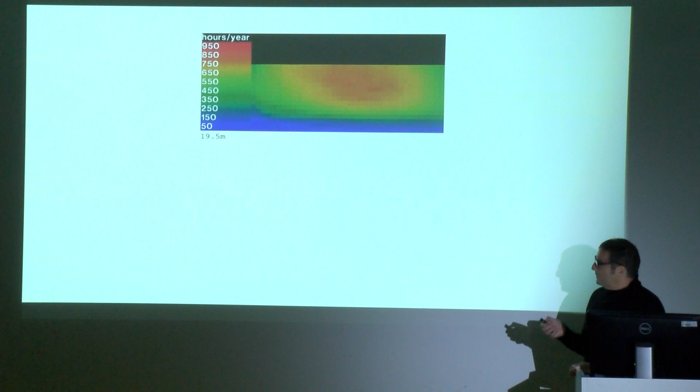So starting with sunlight, these were the kind of first tests we did in radiance at the ground plane, and this is a kind of typical annual year's map of sun hours, which tells you some things. It tells you this isn't very sunny and this is starting to get sunny. It starts to give you a bit of shape about the space.

So you start breaking the information down to the different seasons, but even that doesn't really help determine what you could do with it. So we started breaking it down even more, and we created 6,000 equally spaced isospatial points in space, and each one of those was analyzed and had a set of criteria attached to them.

We could then search through those criteria, different criteria we would set, and understand differences. So this is different times a year and different heights in the site. And what we were looking for was kind of volumes of space that had a certain criteria. So if you think of a garden in this country, you want a sunny space all year round if you can. If you think of a study, you might want something a bit more calm. If you think of the kitchen, you might want it very full of light in the morning, and a living room, maybe it's evening. So the kind of criteria you're setting start to determine what you're searching for.

So simple things we start to look at. This is the most sun hours - all year most sun hours. And this is the lowest sun hours.

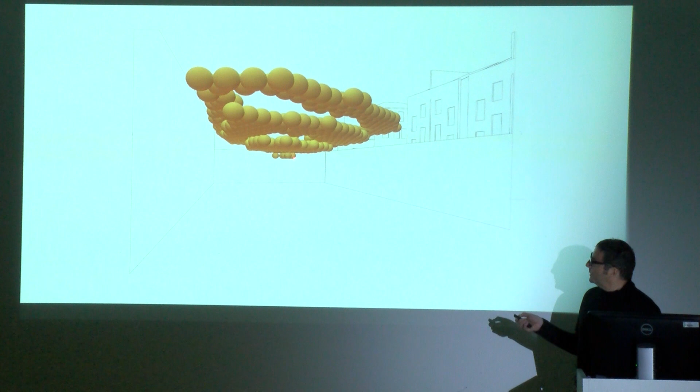So this one ended up becoming where we put the main garden, up in the air, kind of 5 meters up in the air, 2/3 of it towards the end of the site. We put all the bedrooms downstairs because the client decided they were happy with that, being dark.

And then this was a kind of critical one where we found where is there sunlight all year round, which sounds like a kind of obvious question, but what it means is in winter there's sun here. If you remember those maps I showed, there was no sun here, no sun here, but actually there is a little bit of sun up here in winter, and also in summer and autumn and so on.

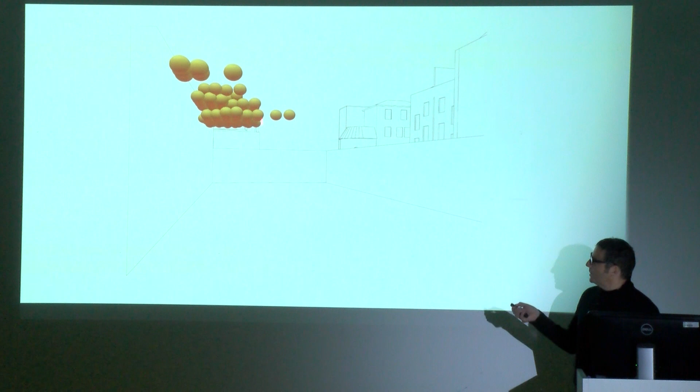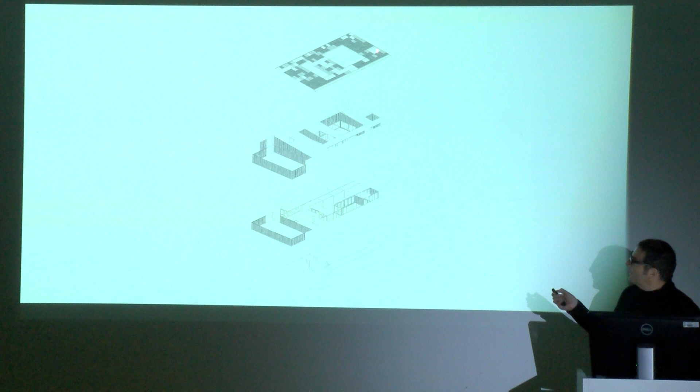So that led to a kind of organization where bedrooms are downstairs around 4 courtyards, and the living spaces are all above in double height spaces, and this very large glass roof that's also highly controlling of the light entering through it.

So you can see here this glass roof, and there's 1, 2, 3, 4 courtyards. It went up to the highest point it could, which is 10 meters up along the north wall, and sloped down to about 8 meters here.

And the kind of organization of the house is visible when you look at the elevation, in that the living spaces are double height above and the bedrooms are all below.

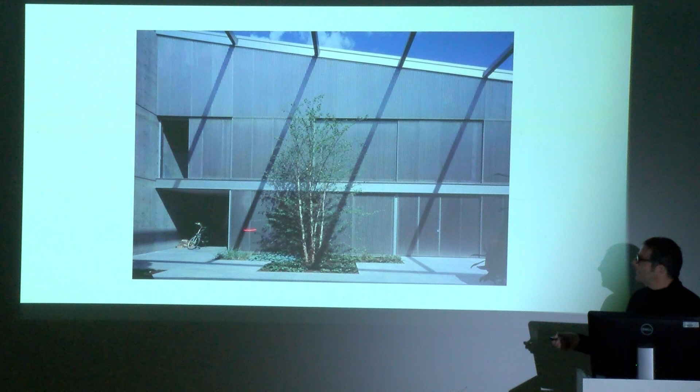And this is where I was showing you that cloud of all year round sun. So what we wanted to do is ensure that if there was sun, we got sun into the house. So if you imagine that gets sun on a winter's day, but everywhere else doesn't on the lower levels. But this gives you the sense that you're connected to the environment and connected to when that actual moment happens.

The house is all built from concrete, which kind of tempered the light, but also helps temper the environment and keep it cool in the summer, so it's all naturally ventilated.

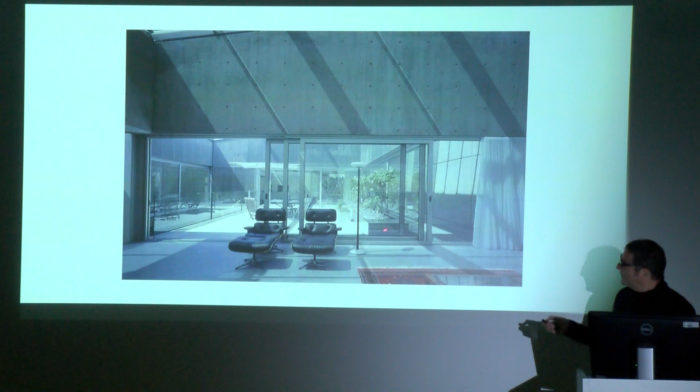And these are the double height living and dining spaces. And looking into the main courtyard that I showed you also where that cloud was, so we're a story up off the ground looking into that main courtyard space in the double-height living room.

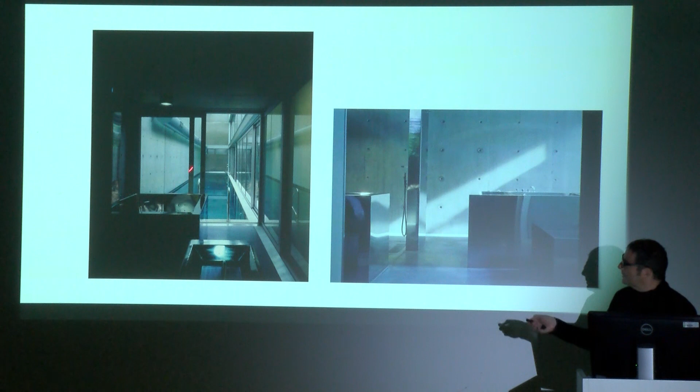And then you go down a level and the atmosphere changes quite significantly. This is the bathroom looking into the main swimming pool. So there's the backland site of the house in the end, hidden away so nobody knows it's there apart from these immediate neighbors. So it's very, very private, but it kind of creates its own environment.

This is a short film that we've been making, and really what we're exploring is the different atmospheres that exist in the house. This is shot in the winter, I think it was around November.

The facade kind of opens and closes. It's very inward-looking, creates its own world. But there are all these sequences of spaces you go through.

So he's now in the master bathroom we were just looking at, which is kind of dark and has a different feeling. Then upstairs you really sense the changes in environment as the sun moves around the site and the weather changes.

There's an awful lot of control of light within the house, so the glass roof has 3 different kinds of frit patterns and different densities, and there are blinds that retract and opening windows that let the air in and light in.

And the rooms were designed for the light to track around, you could see it there, but not where you're actually sitting. So it's very much controlling activities in each room, including how the roof worked.

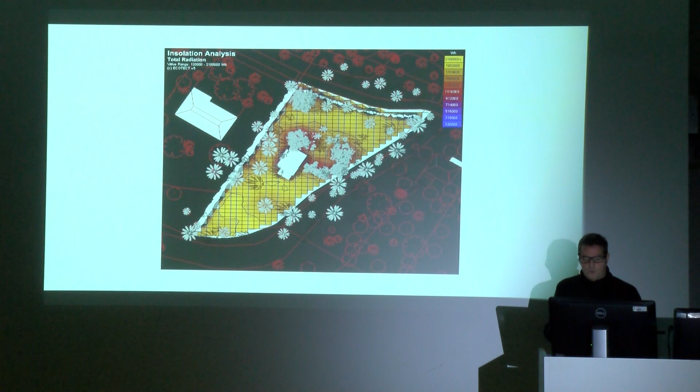So just looking at the sun position on the site, what we were hoping is that the canopy of the trees would provide sufficient shade. We wouldn't have to worry too much, but through this kind of analysis, we realized that wasn't quite the case.

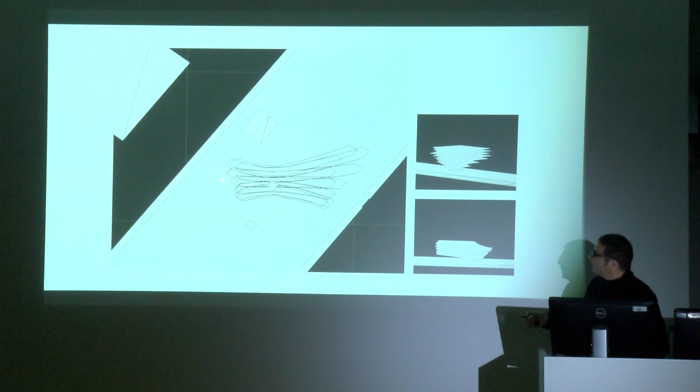So we wanted to find a site where, within the site, there would already be a good starting position by being protected from the trees, but maybe would need more work to do with it. So we started looking at self-shading structures. This is actually using Ecotect a long time ago, where we wanted to shade that 1 square meter all year round and just understand how big the scale of shading structures was to make that possible.

This is a similar exercise with a different plan. You can just see that the edge of the shadow just skirts that plan, and that's the form that's generated.

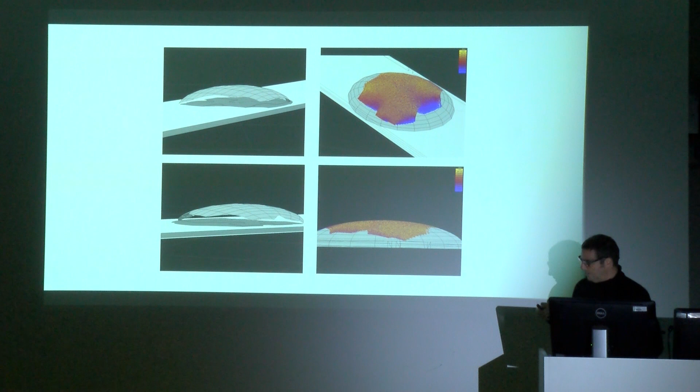And one part of the brief was that we weren't allowed to cut down any trees. So we had to find a space for that to fit, but also work environmentally.

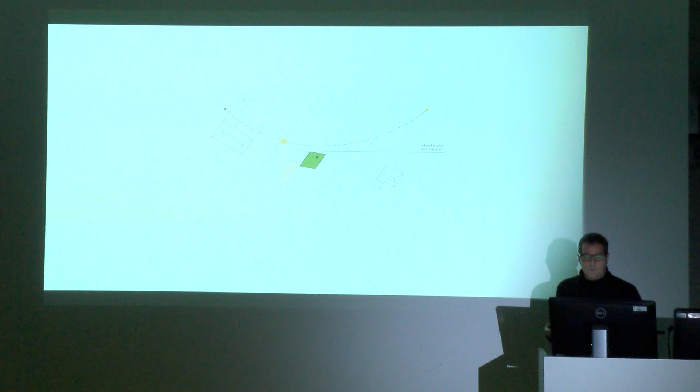So the form we generated eventually was actually this self-shading form that was completely open to the sea here and completely open to the jungle there. Solid on either side because that tracked the sun path. But also it was kind of interesting how it also solved other problems for us in that we got privacy from neighbours here and privacy from neighbours here and a kind of view towards the entrance from the street where you came into the house.

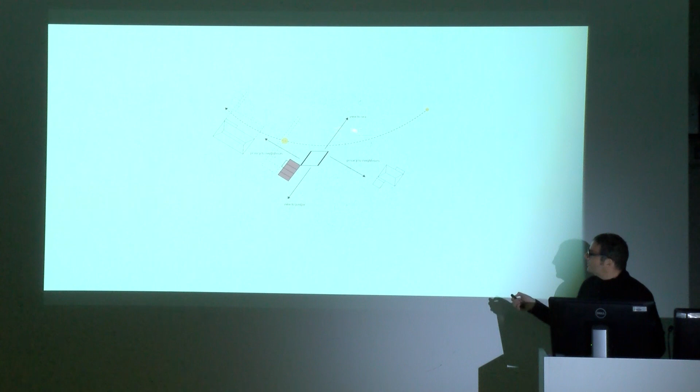So the house is lifted up off the ground to promote the breezes. The two buildings are separated quite a distance to allow the wind shadow to come over the front building into the back building. You get the views by being lifted up to the sea, into the jungle, and then cross ventilation through the building. So we had big glazed screens that open.

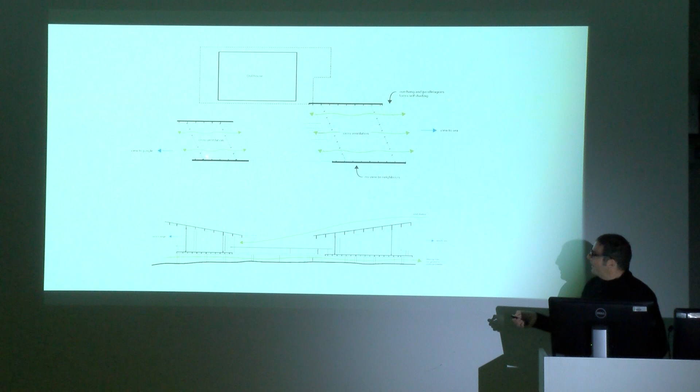And this overhanging parallelogram that we developed, it was all made from local timbers. So this is a very heavy timber used for foundations called kacha, so heavy it doesn't float, and that was used for foundations. Then laurel was used for the superstructure, which we needed in 10-meter lengths, which we found impossible to find in lumber yards.

At the same time, it was quite a complex form, although there's a kind of simplicity to it. Drawings were something we found very hard to communicate with the local builders. So we ended up producing models, literally saying, this is what I want you to build here, but a lot bigger. It was quite an interesting moment because when that model appeared, after having looked at drawings for a few months, they suddenly relaxed and were able to understand what they had to make.

So we built that model, and then we built bigger scale models of every single junction. As you start to look through these, there are some quite complex junctions generated from that simple form. But the fact that each one existed and was coded in such a way that they could easily understand where it was in the building really made a big difference.

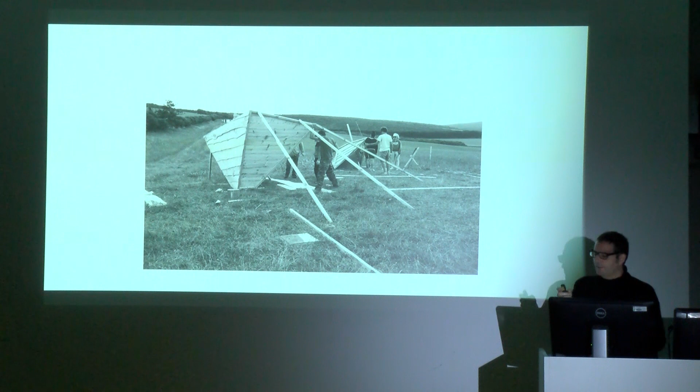So these are the forms being generated, which are a bit like blinkers. They're essentially a way of stopping the sun hitting the mirror other than at the time you want it to happen. And there were 3 different times we wanted it to happen.

This is the sadly recently late Ted Cullinan, who was always a very great supporter of Studio in the Woods, and would come and visit and talk about everything.

But these are our 3 solar mirror forms, which are all entirely different. They're all doing the exact same thing, but just at slightly different times. They're about 2 hours apart.

So we were quite excited that that's what happens with just a simple rule of doing the same thing, but at a different time.

Here you can see the mirror inset and how these forms shade it, and then allow the sun to hit at a certain time, and that would bounce off the chalk.

What I'll show later, but what's really interesting, I think, about this is that you're starting to think about not the sun moving overhead, but you moving, as in we are rotating. And I think that's a fundamental thing about understanding what the sun is doing, is it's not moving, we're moving. And once you start to understand that, I think that generates all sorts of interesting relationships.

Another house in London was on a very tricky backland site. There's a bungalow here built in the 60s, and it pretty much filled the garden, a very large plane tree, a 5-story building at the back, 4-story buildings here, completely overshadowing this site.

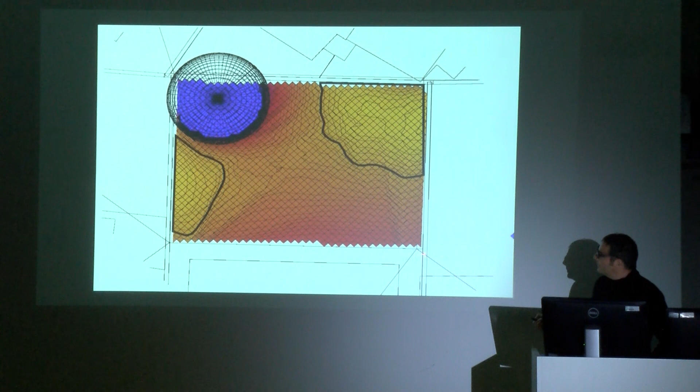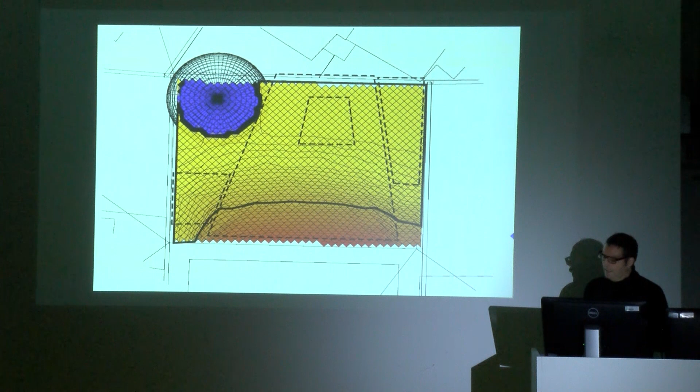And as this goes up higher, you start to think of possibilities of a form that could be generated that might respond to that. So what we realized we were going to be doing was building the house in the shadow of the surrounding buildings and facing out to where there was potential for sun.

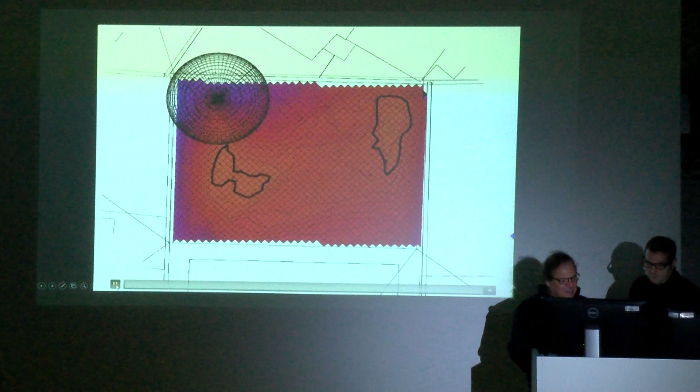So what we realized we're doing is going to build the house in the shadow and look out onto where there is light. So there are three places where there was light, lower down in the ground, where you could have a garden. And we realized that if we went very high up in quite a specific place towards the back of the site, we could create an oculus that would bring light into the house.

And this form was essentially generated through those three things, but also allowing for privacy between neighboring properties and views to be maintained. So we couldn't build something larger than this.

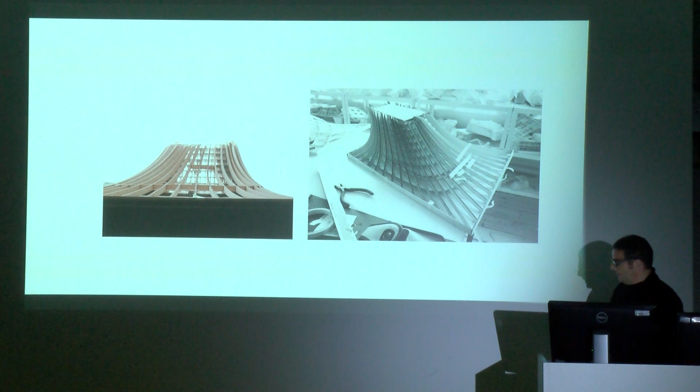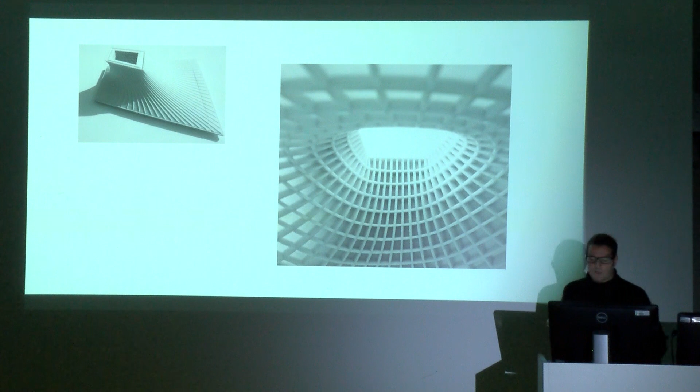So I want to talk a bit about how that roof was built, because I think it's interesting. It's generated from a certain process, and then you've got to overcome the problem of generating quite a complex 3D form. So we decided to build it in timber, and we started exploring different ways of doing that with different techniques, and ended up with a glulam structure where every element is curving in three different directions because the form itself is not symmetrical.

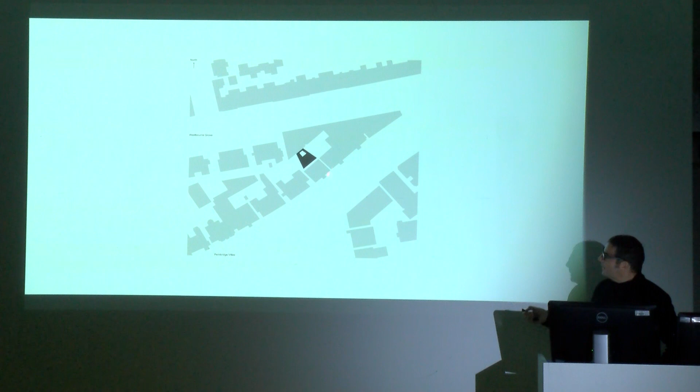The house is built behind these existing houses, so it's overshadowed by all of these in this garden. I'm just going to take you through the plans. You enter down the side here. This ground floor is a living space and kitchen entrance, and that's a light well here, and then the main garden here. You can see it's exactly mirroring that form I showed you in the analysis.

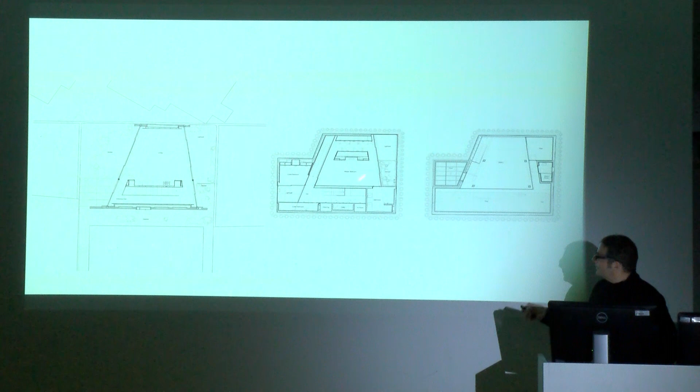As you go downstairs, there are two bedrooms on this floor, one larger bedroom overlooking this light well, a smaller bedroom looking to this light well, a bathroom looking to this light well, and another bathroom looking to this light well. Each light well has a skylight that also serves the lower basement, which is a kind of yoga space, a gallery, a swimming pool, and a plant room.

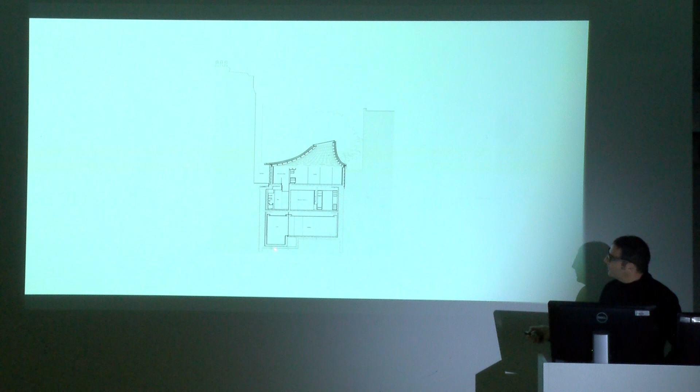The basement construction was all top down. We found a Thames ring main 40 meters underground, and they tried to stop the project. So we had to build the basement top down, which is essentially casting the slabs, digging out the earth, casting the next slab, digging out the earth, casting the next slab after you piled. But actually the good thing about that is you don't have so much temporary works, and your neighbors don't really know what's going on, which is really helpful.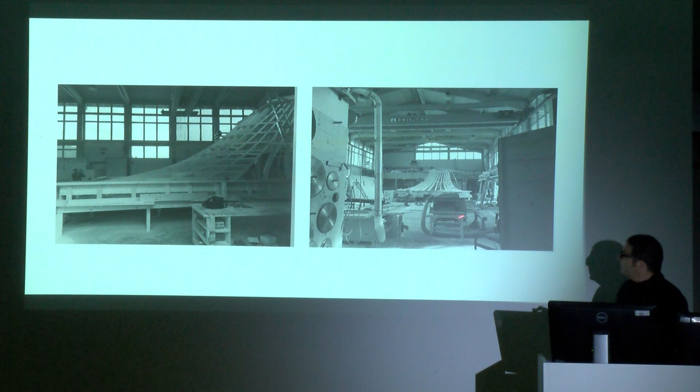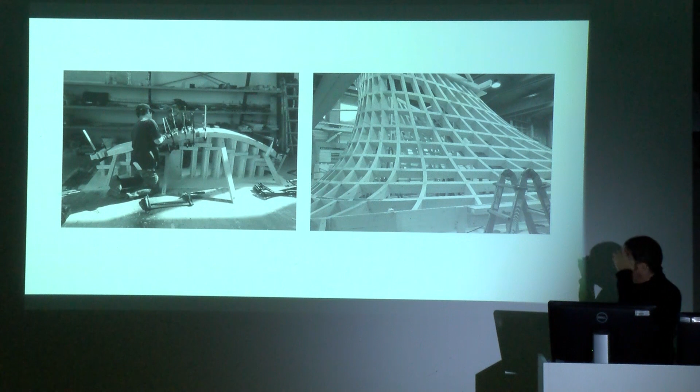Each glulam beam is individual and curves in one direction like that, curves like that, and then curves a third way as well. And somehow they put them all together, as you can see here. That's a drawing of one of the beams, so there are individual drawings for every single one. You can see this is a kind of supposed plan view, but it's showing all the twists and curves. That's a kind of elevation view, and that's the third view of that piece with all the dimensions.

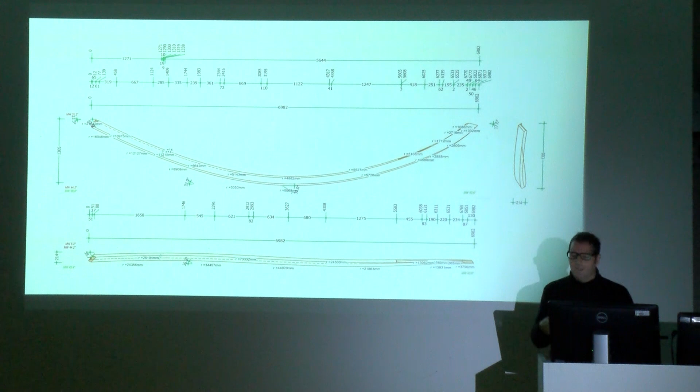What I was interested to find is that we had built a very accurate 3D model of the roof, which all of these drawings were generated from. We'd always assumed it would be built in a kind of CNC cutting way, done using computer-controlled methods. In fact, it turned out it was all done by hand using quite old craft skills, but using, you can see on the ground there, one-to-one prints of the 3D model that were lofted. So using very old techniques to make these glulam beams, slicing them up and gluing them together over formers.

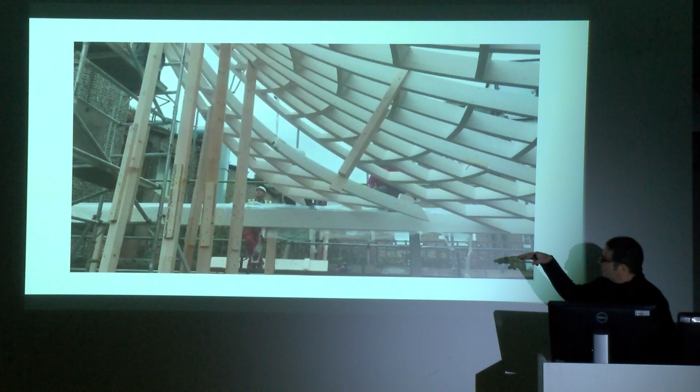There's a timber beam on each side that spans front to back, and then two concrete upstanding walls that hold the roof. So it's all sitting on this ring, essentially.

They're going to do it. Yeah, so it just fits.

Externally, that was clad, again, in a kind of much more low-tech boat building technique of cross timbers, like 2x1 softwood, to get this complex curvature.

Then to do the copper on the outside, we helped the copper contractor a lot by providing him with one-to-one printouts of each piece of the copper. We gave him every 5th piece that we printed out on our plotter, cut out, and then rolled up, and then they rolled them up on site, and then they could generate the next ones from that. But this was, again, a kind of revelation for them, because they thought it was such a complex thing to do, and we showed them, well, actually, if you just unravel from the 3D model, which we did very quickly during a meeting using the Grasshopper script to unravel all of this, they suddenly understood, actually, well, that's not as complex as we thought it would be.

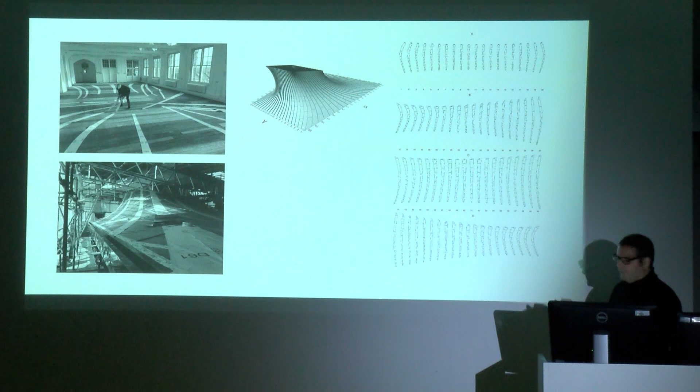So inside, that's the main living space from the garden, and looking up to the oculus with a light that's always kind of changing as you look through it.

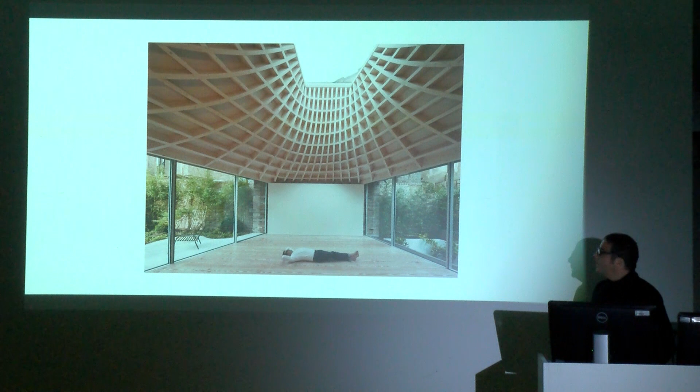That's the kind of rare moment I had when a building's finished and the client hasn't moved in, which is usually about half an hour. But it's a very nice thing to be able to do, just to take in what you spent the last 10 years of your life doing and experiencing it a bit. That was half an hour later, roughly.

I'm always surprised when I go there and look at these images, understanding what that site was like before we did this. It was, I would say, a pretty miserable place, and I would say this isn't a miserable place.

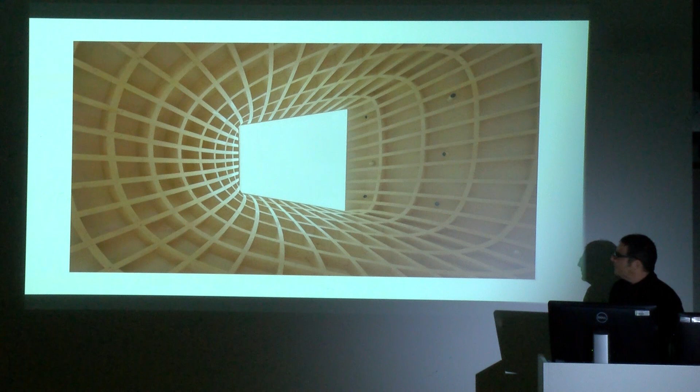Some of these are over 24 hours, so you're getting a day and night. Some of them even have moonlight, I think. This is looking up to the oculus, and you become intensely aware of the weather, of cloud cover controlling what's happening within it, what the sun's doing. It's constantly changing the atmosphere within the house, and one day it's doing something completely different to the next. As it gets dark, it reverses, and you look up to the sky, and you can see the stars now.

Moving through. It's quite a mesmerizing thing to look up through a hole in a building, actually. You can spend a long time doing it.

This is where I live, here. So I look down on this house. Part of the reason it came into existence is obviously I knew about it, having lived in this building on the top flat, looking down on that bungalow.

So I'm going to show you 2 more houses and then another project in China.

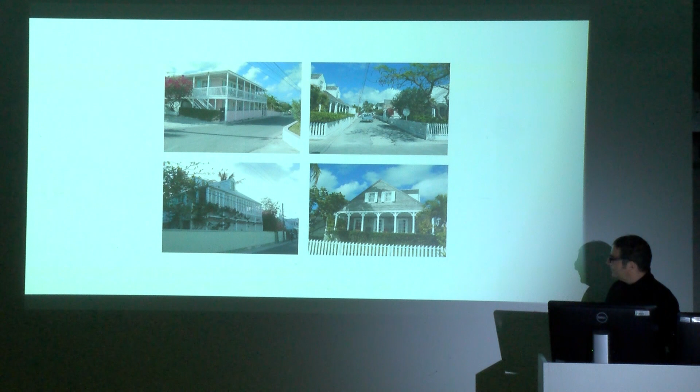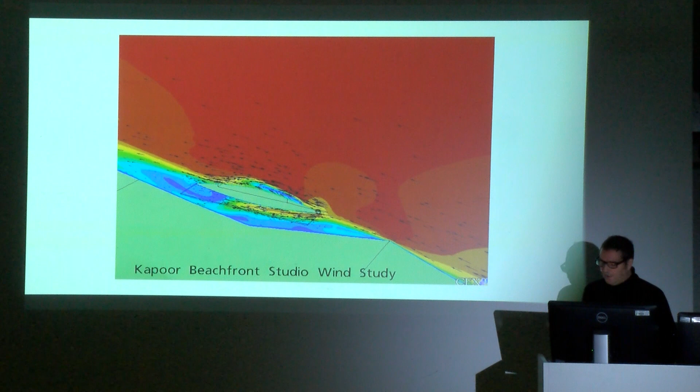So we started doing some studies of wind and forms, and how you can generate a form that might be able to work with the wind, work with the sand dunes, protect itself from the wind and be comfortable. Because it's not just hurricanes, but normally when you're there it can be quite windy and not that comfortable.

This is a kind of copy, the house on the site. It's a copy of some of the local houses, built in the 80s by an American family. But it mimics what the houses do, which is generally have big overhanging roofs, big outdoor spaces beyond, and a kind of inner sanctum there.

So our brief was to refurbish that house, build a bedroom pavilion on the beach and a guest tower up on the hill. And we wanted to take that typology of these balconies but work with it more specifically to the site and what the sun was doing.

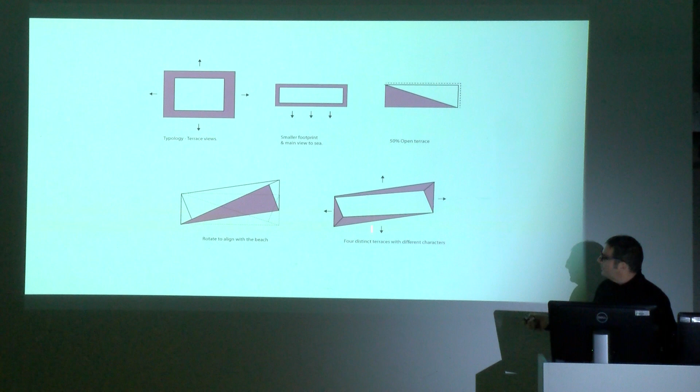South is here, and this is east and west, to generate these different outdoor spaces that react differently to the site. So that's the master plan with the existing house.

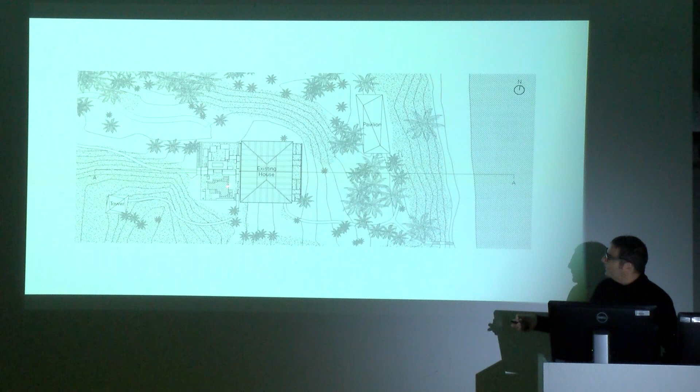We created a new garden that was protected from the wind, on the hidden side from the wind, a pavilion bedroom on the beach, and a tower on the roof, on the hill.

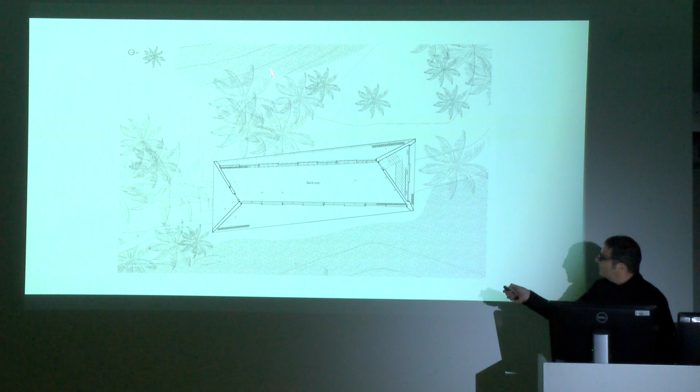So this is a bedroom with balcony terraces on three sides, facing the sea here and facing back that way. And you go down to the bathroom and dressing area here, which looks out to the garden.

The whole building was built out of concrete, not surprisingly, because of the hurricane. There's actually no materials on the island other than the sand. So we used the sand from the land where we dug the foundations, cleaned it and mixed it into our concrete mix, trying to emulate the color of the sand on the beach.

But it's not only concrete, it's also solid concrete, no insulation, no other materials on the roof. So waterproof concrete everywhere, the whole thing, including the bathroom and the stairs. It's basically concrete and glass, and that was the building.

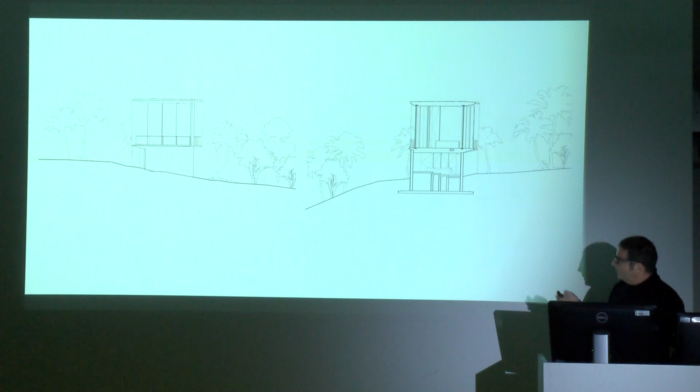There was a bedroom tower up on the hill with similar geometries and balconies, peeking up with a very different view, looking out in different ways.

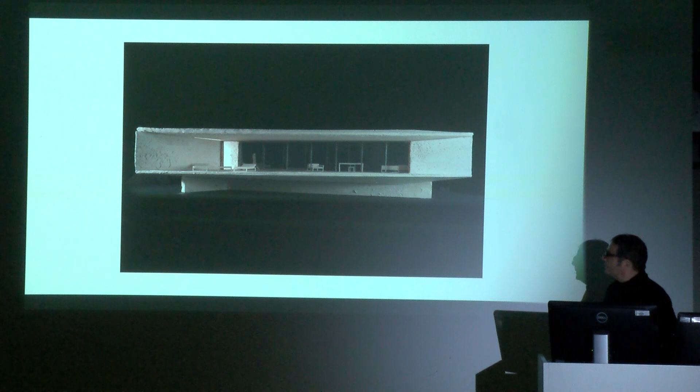So these are models we made studying the form of the roof and the space itself, and the geometry that the concrete could work with and the thicknesses we could work with.

And we built a mock-up on the main island where the concrete contractor lived, to test all the detailing and the actual concrete mix, and how you do drips and how you turn corners and so on.

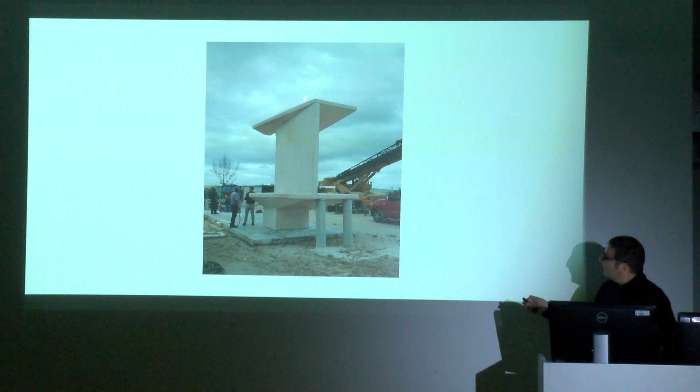And started building. It's an amazingly simple building method. You dig out the sand, you basically just level it, but you don't compact it in any way. And pretty much we poured concrete onto this.

This is the dune here, so this is actually the lower levels of the main pavilion. And the concrete mix I talked about was locally sourced to try and mimic this color, the tower going up.

Working on the beach, it's quite a nice place to be.

The finished structure was then, these are about 18-meter spans we're doing, big openings on either side of the bedroom. And then this hole allows air from the sea through to the garden and these spaces here.

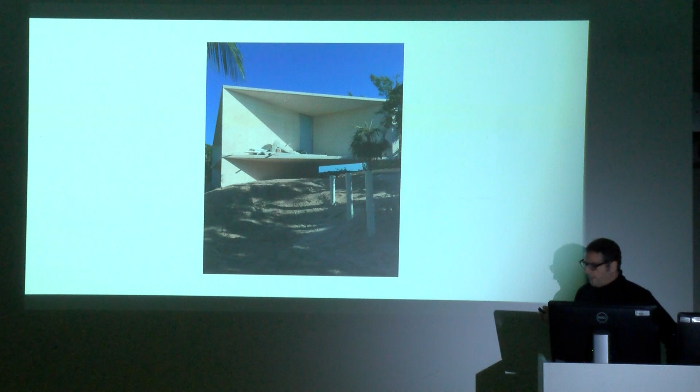So it's kind of hovering on the edge of the beach, quite hidden from the beach. And these big overhanging roofs create these shaded spaces as well. Really it's all about the view, which is an extraordinary view out to the beach and to the sea beyond, so we wanted to create that framed view.

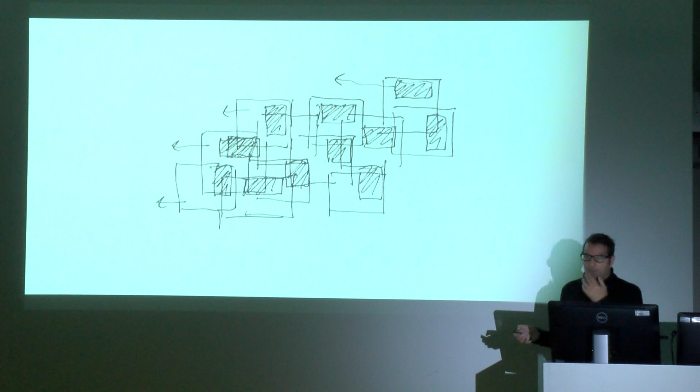Through discussions, we realized what you want is not a lot of internal space, but an awful lot of external space, so the unshaded and shaded external terraces.

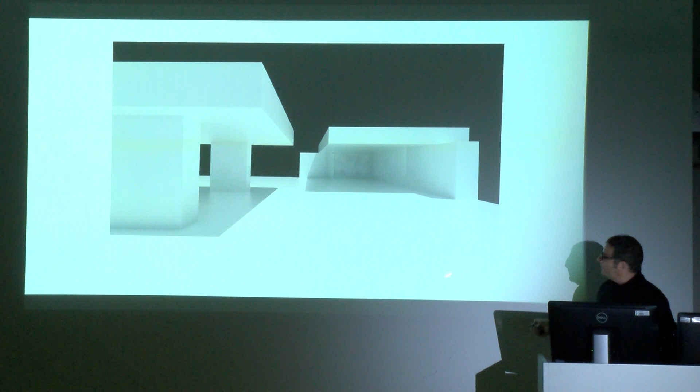At the same time, a very important criterion for the project was to have this sunset view to the islands. The sun moves around the site and you want to look at the view. So the schema we developed was essentially big walls of concrete, big roofs of concrete, big slabs of floor of concrete, generating shade around much smaller glazed spaces that would supposedly be the inhabited spaces, although I think this house is all about being outside.

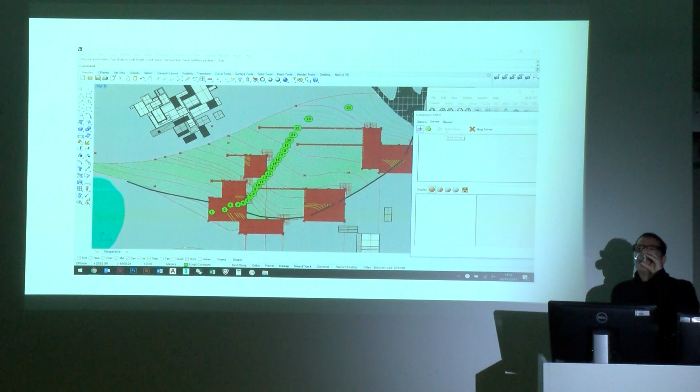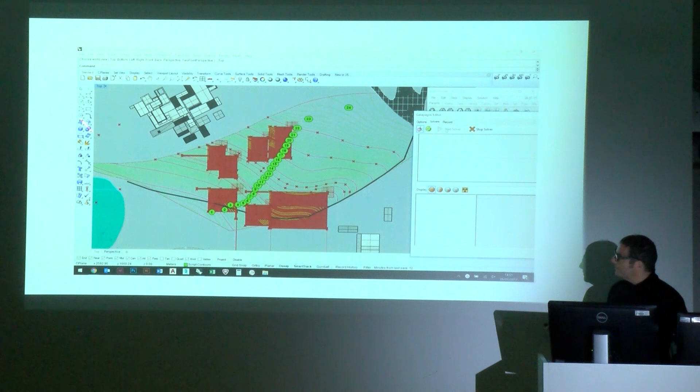Having developed that schema, we were able to put it into Galapagos, an evolutionary solver, for a series of criteria we set. Some had to do with not going over the boundary of our site, some with the overhangs—we knew the size we needed because we'd done analysis of how deep the overhangs could be.

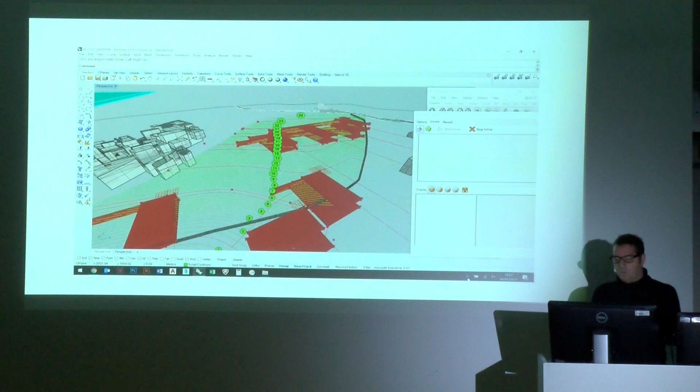Some criteria were to do with having a view to the west, so each room had to have a view west. Basically, we were trying to find a position on this topography. These numbers go from 0 to 24, every meter going up—it's actually 24 meters from the bottom to the top of the slope we're working within, trying to arrange these spaces to satisfy all these criteria.

That's an optimized solution from that set of criteria that was generated, and we then used it to help inform the next stages of design.

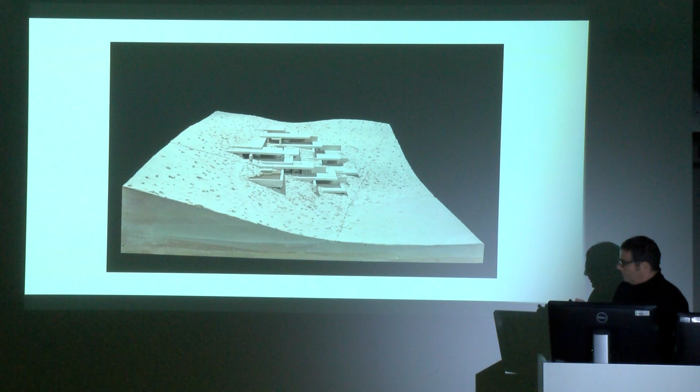Under here are more bedrooms cascading down the hill, each one private from the others by overlapping these elemental planes. And that's the view looking back from the sea.

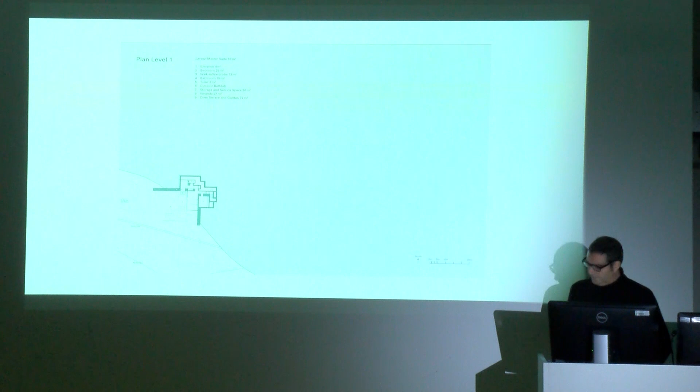The plans start the bedroom suite at the bottom and work up to more bedrooms as you go up the hill. The master bedroom suite has this very small bedroom and a huge terrace—that's the shaded area, that's the terrace, that's the bedroom—and then bathrooms hidden in the hill behind.

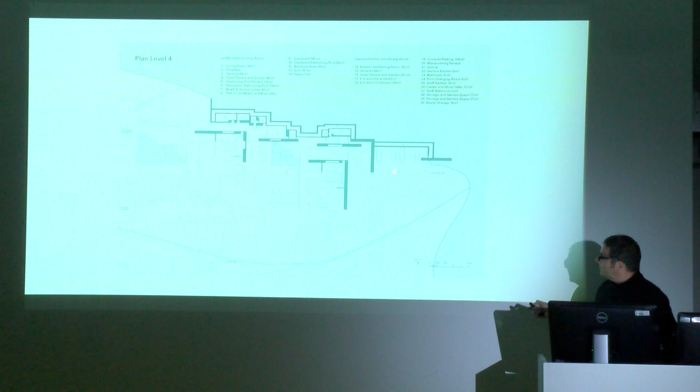As you go up, there are more living spaces. This was the entrance I talked about, the swimming pool—you go towards the sea there. All the rooms are separated from each other; there are no corridors, and you go outside to get from one room to the other.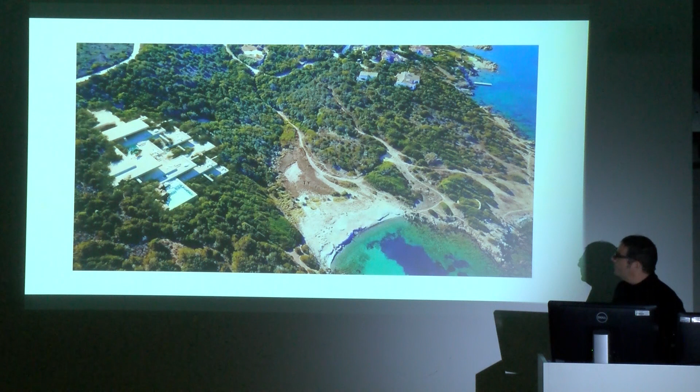That's just an excerpt. This is an aerial view of the project, which is now in for planning, along with views we've generated of what it's like to experience it. It's quite elemental, mimicking the rocky outcrops that appear in the landscape. This is our house that actually surprisingly disappears.

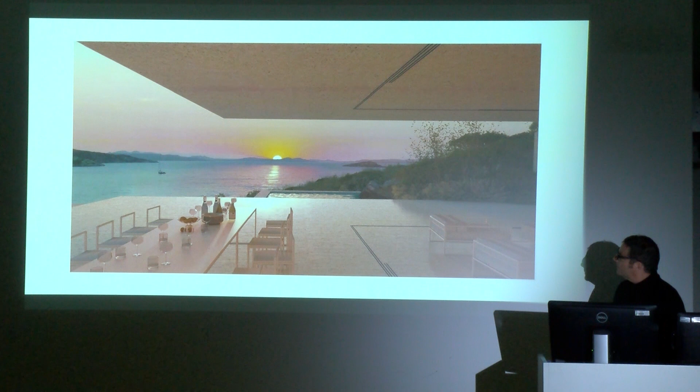It's quite a large scale element, but from this view specifically it almost disappears, and as you get closer into it, it becomes more enveloping. And the sunset, which is a main criteria for these views.

In China, we've been doing some projects in Taiwan, and through connections with a Taiwanese architect, they invited us to do a competition for a research and development headquarters for a mobile phone company, the third biggest mobile phone company in China. We won that competition.

It's a very big project, a very different way of working for us. It's extremely fast, extremely challenging, and what we're doing is basically being concept architects, and then it's taken away from us and they do what they're going to do with it. So we're constantly trying to stay on top of it with them.

What you get at the beginning is a drawing like this that basically tells you roughly the rules of what you can do. So you look at this and think, I can go 40 floors here, 4 floors here, 38 floors here, 4 floors here, I think this is 14 floors, and so on. It tells you what the setbacks are, where you can put the building.

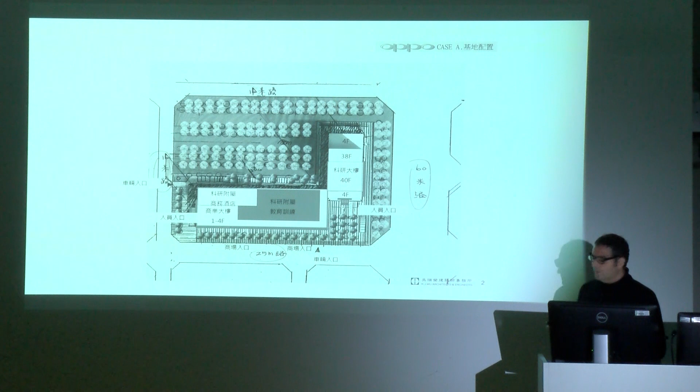So before you start, you can't do any of the things we're used to doing, like working out where you'd put a building on a site, how it would relate to the street, how it would relate to other buildings, what the context would inform. You're actually just told, here's a rectangle, that's how high you can go, now can you give us a design please? So within those constraints, you have to find a way of working.

So we started by just modeling the form that we couldn't have, in a way, and starting to understand, if you break that down, what could you do?

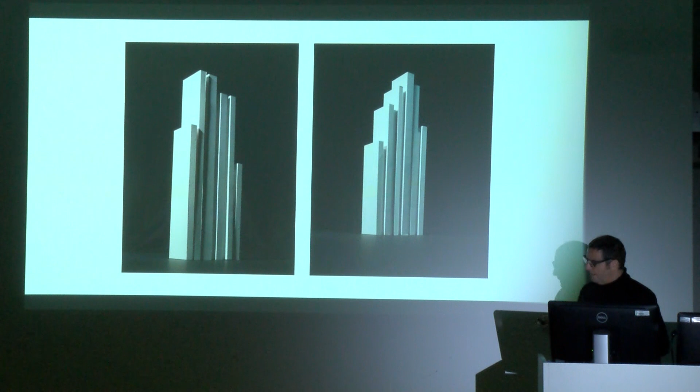We were quite interested in shifting these elements to slightly self-shade the building, creating ways of not having the elements fully exposed, having recesses in the facade that could also be shaded, and thought that would be an interesting starting point.

So again, this is showing pulling the elements apart and lifting them apart, and then the skin, the facade that would go on that. So the facade rule was interesting.

The client wanted a fully glazed building, but the local authority wanted it to be 30% solid. So they were assuming a more solid building with windows, but our client insisted on finding a way it could be read as fully glazed. And what's interesting is that it starts to give us opportunities to do something more interesting with it.

So by stepping the facade in the same way we stepped the elevation and the plan, we were able to have 3 different positions for the glazing, with the mullions in the same position, so that we could have different depths in the facade.

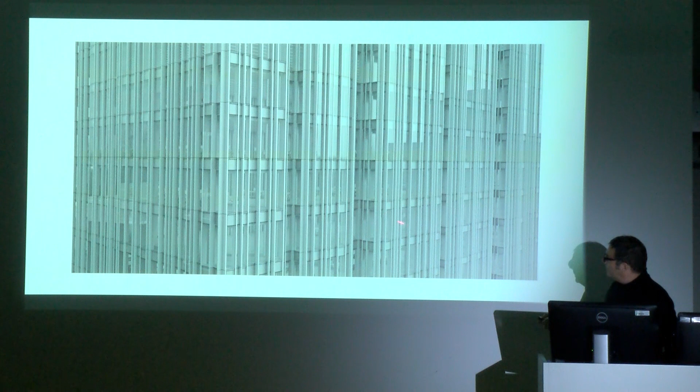So you get these shaded parts, a percentage of the facade is shaded, and as you look at it from different directions it becomes more and more solid. In some directions it looks entirely solid, and it technically fulfills the 30% requirement. That's the facade, with these different steps within it on plan and on the facade.

The plan itself, we worked hard to get quite shallow floor plates, putting the core in the middle. These are about 10-meter floor plates, so they get very good daylight all the way around the spaces. You can see this facade stepping in and out, and the actual glazing itself mimicking the same thing, that kind of self-similarity happening.

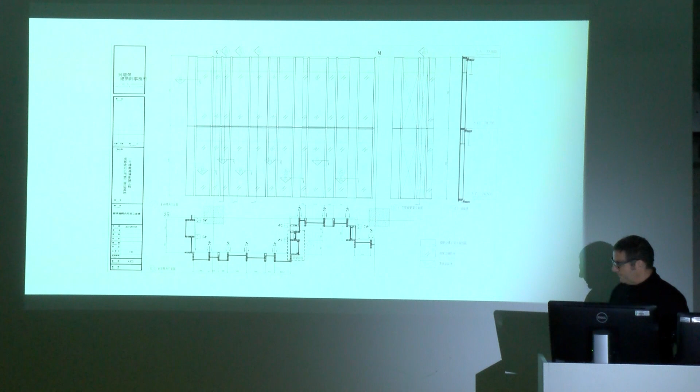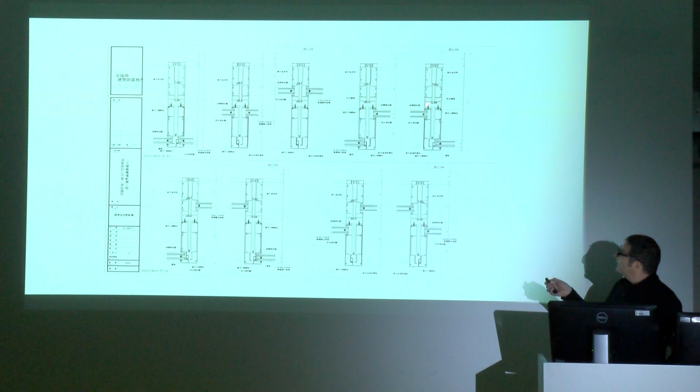And then these are each component of the facade, each mullion, and all the different ways you could have front and middle and front and back, and so on, of the facade.

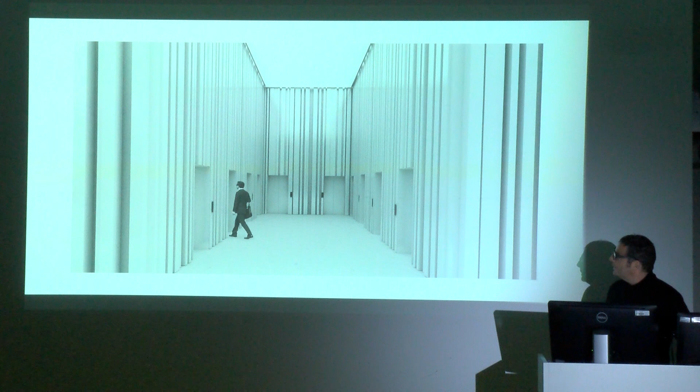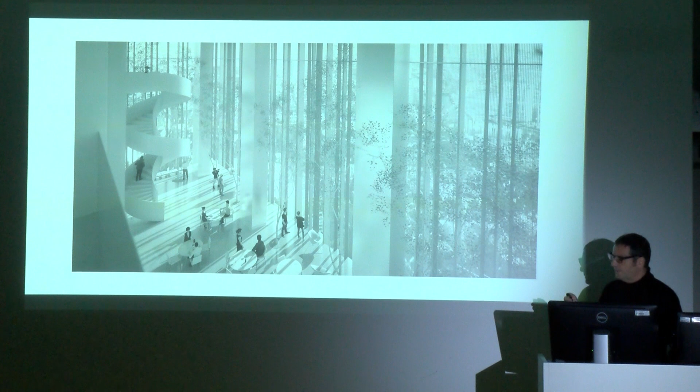So we worked on the interiors, trying to take through this idea of self-similarity and the layering of the facade within it. And managed to get some spaces - I think halfway up the building there's a 3-story triple height space all the way around, a kind of central meeting and activity space. Then the offices themselves, the floor plates have this sense of connection to the outside through projecting bays in each structural bay.

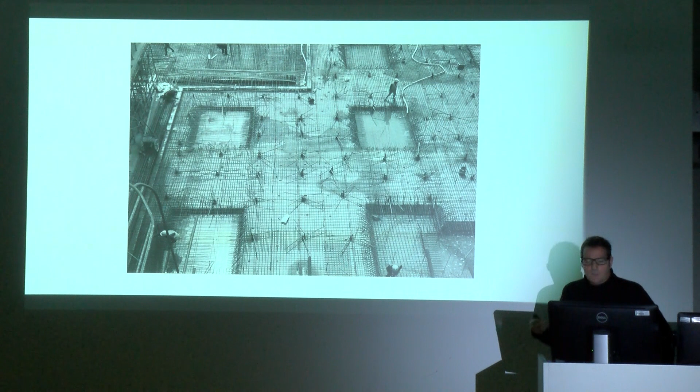And the biggest surprise is actually being built. So that project went quiet for 4 years, and then January this year I got a call saying, can you help us with the lighting? I said, of what? They said, well, we're building the tower. So I kind of insisted, went over there, and have been managing to work with them since to improve the changes they've made. It's quite a leap in scale for us, from doing houses to doing a 42-story tower. But in China, a 42-story tower is just what is built. It's completely normal, and you can't question that, but it's been very interesting to experience.

This is a mock-up, full-size mock-up of part of the facade. So I managed to go and inspect that and comment on it. And this is it - about 2 months ago, they'd got up to, I think, 14 stories high.

We make a lot of models in the office, so I'm just going to show you a selection of them. We've been cataloguing and photographing them recently because we want to make a book, because I think it's very important. So even though we work quite a lot digitally, we also work very much making things and understanding materials and light by making things.

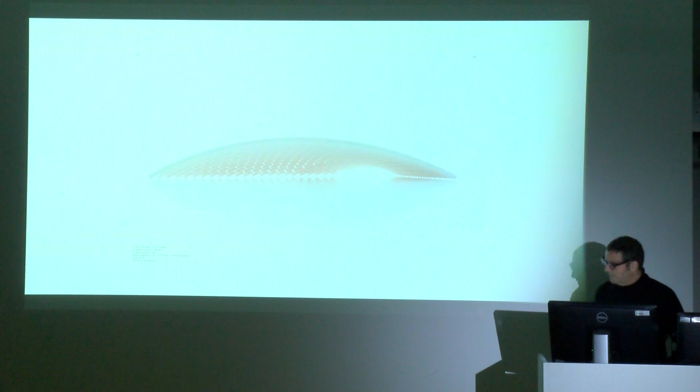These are some early models for the Bahamas project. This is actually a temporary space in Taiwan made out of containers. So each one of these bricks, as I call them, is a container. And it spanned, I think, 130 meters. Sadly it didn't get built. I would have liked to seen that.

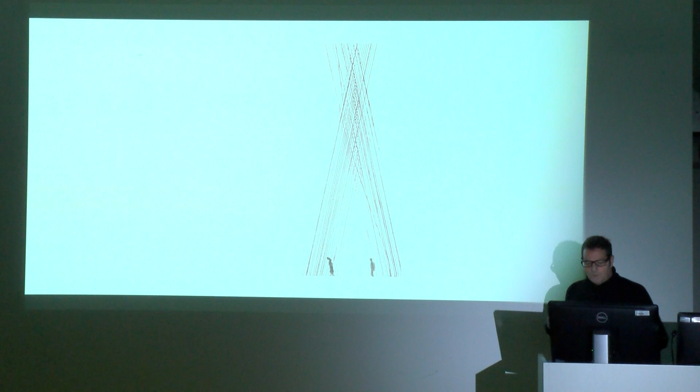They're all quite different, the models. They're all using different techniques. We don't have a set way of working - it's often to do with who's working on the model, but they're all exploring ideas that are fundamental to what we're looking at. There's a very early model of the Oppo Tower.

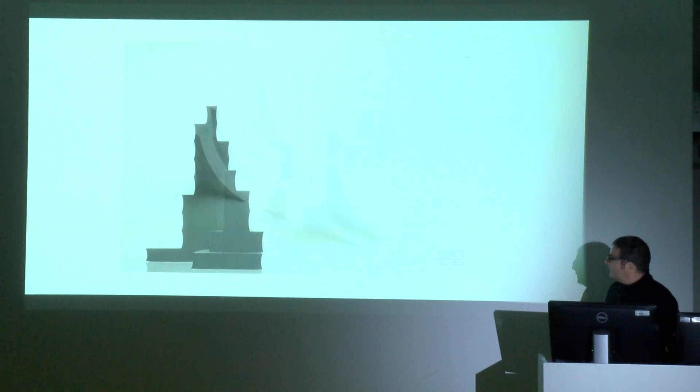But there's something very different about a physical model compared with working in the computer. It's very, very fundamental. I'm just going to end with a quick...

We return to the idea of... so we do Studio in the Woods every year. We always work with something to do with sunlight. But we return this year to the idea of the mirrors.

This is in the Wyre Forest. So we kind of reversed what we did before, and instead of building a structure where the mirror is, we built a structure where the mirror reflects onto the underside of the darkest space we could find in the forest.

So the process in Studio in the Woods is you meet your students, you start to walk around the forest, you find a site. We kind of knew we were looking for a dark space to bring light into. So we walked around with the mirrors and did various tests, trying to find the best place for it to happen.

And it starts off very low-tech. You're just holding it, trying to work out what it's doing. You're realizing that actually you need to find a clearing for the sun to come in, and then you can point the mirror to the dark space.